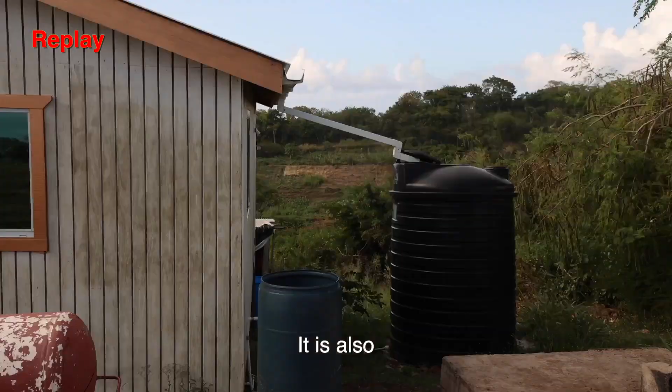For climate change, what is Grenada going to experience? It's going to experience water shortage, particularly after storms and hurricanes, when the water system breaks down and you will need water in between. Rainwater harvesting could help. So rainwater harvesting is not only about getting water for drinking or for use, it is also about minimizing flooding and flood control.

The presentation on rainwater harvesting is in two parts, and the second part is going to be done by Mr. Alan Gilbert again. In case you don't quite remember who he is, he's standing right next to me. He's the Senior Technical Advisor at GIS, and he is going to continue with the presentation. He's just keying things up. So again, pay attention and learn.

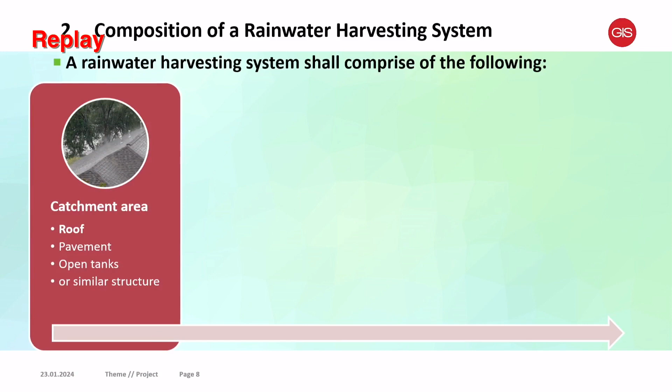There's a conveyance mechanism, which refers to what carries the water into the tank—guttering, gullies, and channel pipes—including a very important first flush system, also called a first flush diverter.

And then there is a storage tank or cistern, and we heard that the most common one is plastic. Concrete is the next in line, and there are also surface ponds and other similar structures.

And finally, there's the delivery or distribution system that speaks of the pumps that pump the water through the house, or pipes, taps, and hose.

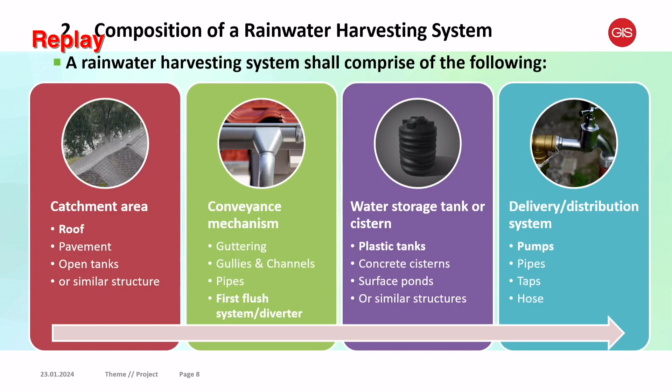And so now we get into more serious issues: design, planning, and approval requirements. And obviously, we have 2 persons from planning here, Ms. Janice Leslie and Mr. Houston Elcock, who is a technical officer in the Planning and Development Authority, so he's maybe able to answer questions relating to planning and design and approval later down. Okay, let's see if we can get through these.

Obviously, I'm trying to do some numbers here in second gear, and might pick it up a little bit. So under chapter 3, in the design, we have: all new buildings for domestic, commercial, industrial, or governmental use shall include in the design submission to the Physical Planning Authority an appropriately sized rainwater harvesting system in keeping with table 4.1, 4.2, 4.3, and 4.4, which you will see later on.

As I go, I just want to point out, if you have a point of clarity that you need, feel free to stick your hand up, and maybe the head table can help point that out so that I can give the clarity.

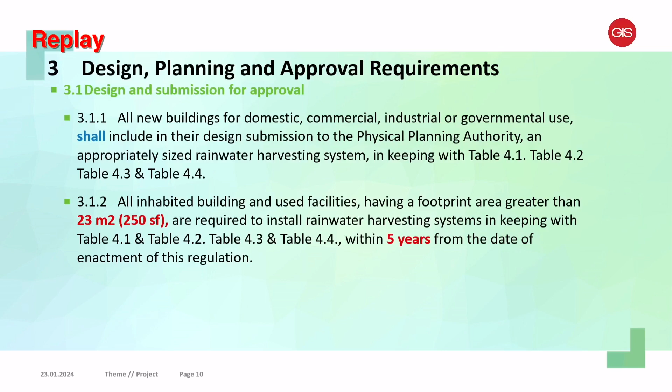We continue. In cases where a permanent structure must be constructed to facilitate the rainwater harvesting system, appropriate structural drawings shall be prepared and submitted by an architect, engineer, or draftsperson to the PDA for approval.

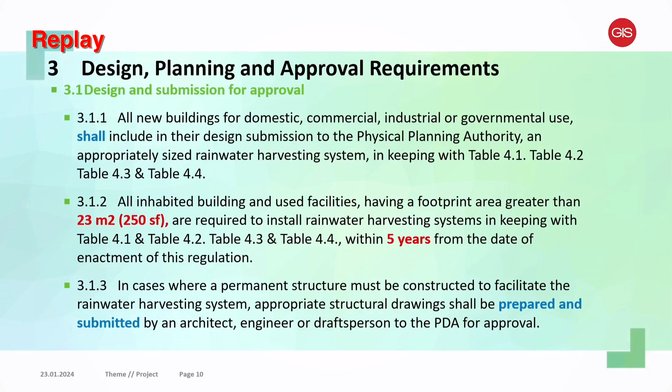In the event where a prevailing circumstance prevents a new or existing facility from having a rainwater harvesting system, a special request for exemption must be made in writing by the owner to the PDA, carefully describing the circumstances. The PDA will review the application for exemption and only approve the request in writing if it is satisfied that the request is reasonable. So I know everybody is interested to know what are these prevailing circumstances, and here they are.

One, little or no suitable space for installation of a rainwater harvesting system—that's going to be predominantly in the town areas. The installation of a rainwater harvesting system will pose a significant risk to the safety of individuals or nearby property, or in cases of extreme poverty of the inhabitants. And I move on.

Drawings submitted for approval pursuant to clauses 3.1.1, 3.1.2, and 3.1.3, the previous ones we just read, shall provide sufficient details for the construction and/or installation of the appropriate rainwater system, and should include all 4 components referred to in section 2.1.

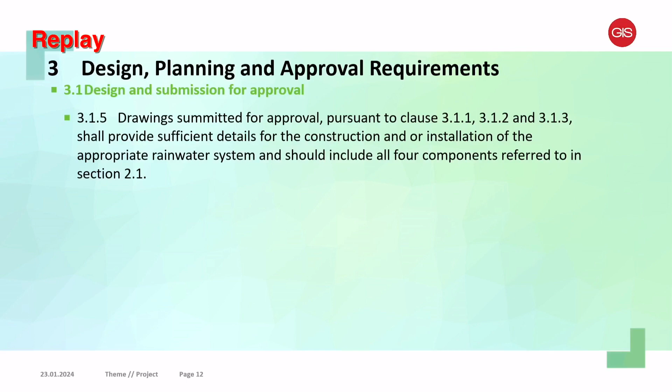Yeah, for clarity? Yeah. So back to the slide before. I think everybody can hear me, Mike. Okay, this slide? Yeah, the one about suitable space. So clarity or query? Okay, all right, fair enough.

So the question I have is on the suitable space, little or no suitable space for installation - who determines what little or suitable space is? For example, if I'm in town as you're suggesting, and there is space for a 100-gallon tank, but I want a 1,000-gallon tank which can't fit, would I be obligated to put a 100-gallon tank?

Okay, so very, very good question, but one meant for the next section. So I'll ask you to stick a pin on it, maybe note it, and have my colleagues also recording it so that we could come back to it, because we don't want to miss that question, okay? So I know if we start, because we've been there before.

All right, so I think I am here. Let me just make sure I'm not missing anything. So, drawing submitted, okay? Shall have sufficient details.

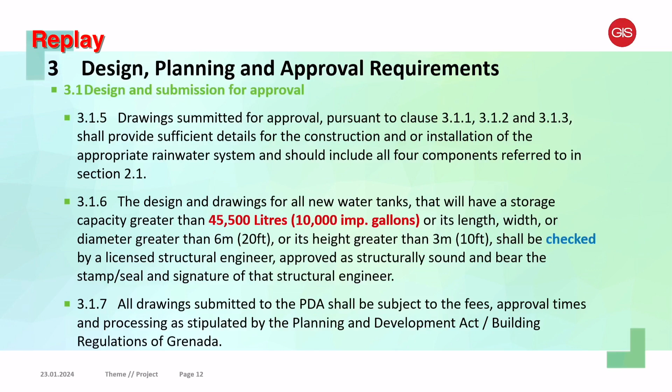3.1.7: All drawings submitted to the PDA shall be subject to the fees, approval times, and processing as stipulated by the Planning and Development Act or Building Regulations of Grenada. And there's a waiver - application fees will be waived for submissions whose building footprint area is less than 250 square feet and does not exceed 1 story high. Okay? I believe that's also clear.

All tanks or cisterns which shall have a storage capacity greater than 50,000 gallons shall be designed by a certified civil, structural, or water engineer, or a combination of the above.

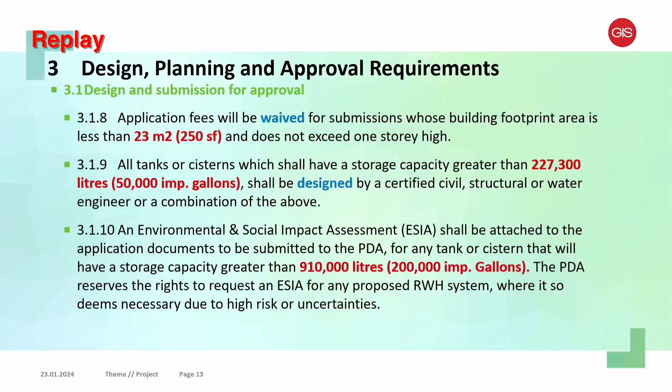Okay, moving right along. All right, so that's it for design and approval requirements. Now we go to storage capacity requirements, and we're looking at domestic storage.

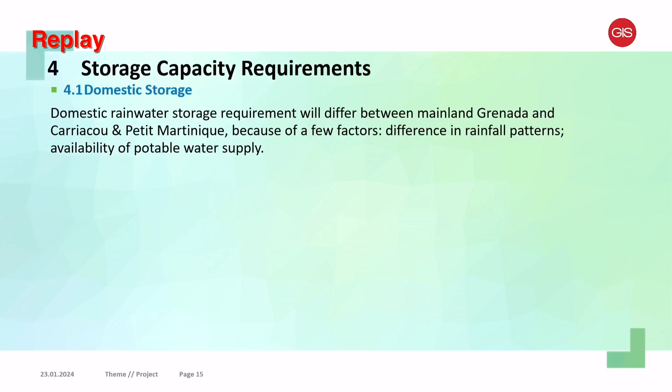4.1: domestic rainwater storage requirements will differ between mainland Grenada and Carriacou and Petit Martinique, because of a few factors - difference in rainfall patterns, availability of potable water supply. This is for clear reasons. We went to Carriacou with the same numbers as for Grenada, and the people who came out clearly indicated to us that the numbers were too small, so we increased these based on the consultation done at Carriacou.

So we'll see those later. But for Grenada, domestic rainwater storage is based on the footprint area of the building, with the minimum storage capacity shown in tables 4.1 and 4.2. For calculating average storage on mainland Grenada, a factor of 0.75 gallons per square foot can be applied. This is just a general rule of thumb for designers - they can use this to come up with the minimum.

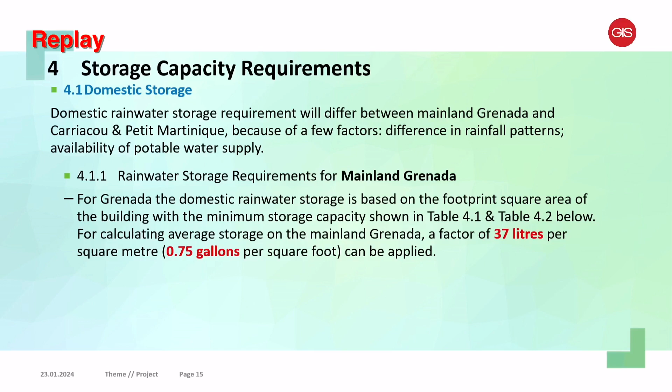So we have - it's reasonably visible - the minimum storage table before us. For a building that's less than 250 square feet, and we'll just deal with the imperial gallons - we have 3 units of measurement here: liters, imperial gallons, and US gallons - it's 200, they will be required to have 200 gallons. And so on and so forth.

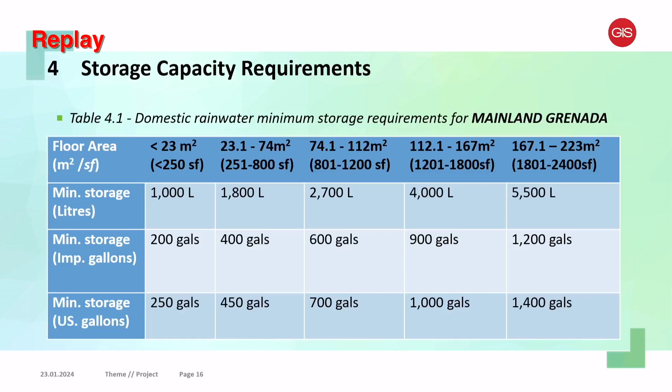So between 251 to 800 square feet, 400 gallons. 800 to 1,200 square feet, 600 gallons. From there up to 1,800 square feet, 900 gallons. And 1,801 to 2,400, 1,200 gallons. It goes on with a few more sizes, 2,100 up to 4,000 gallons. I'm sure you can see the numbers instead of me just repeating them. I'll leave a few seconds for you to look at it, and we'll proceed.

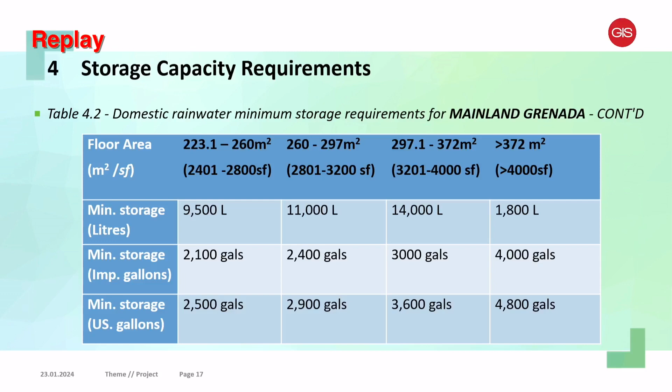All right, so for Carriacou, I just go to the bottom. Instead of 0.75 gallons, it's 5 gallons per square foot.

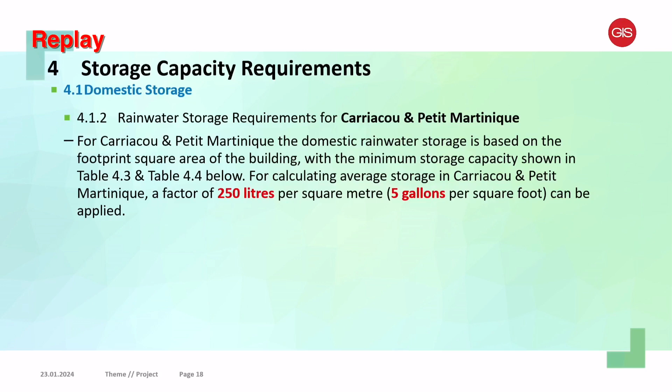Okay, and the tables are as follows. This is 4.3. So for the same 250 square foot house that was 200 gallons in Grenada, in Carriacou the requirement is 1,000 gallons. And goes all the way up to, for between 1801 to 24, it's 12,000 gallons.

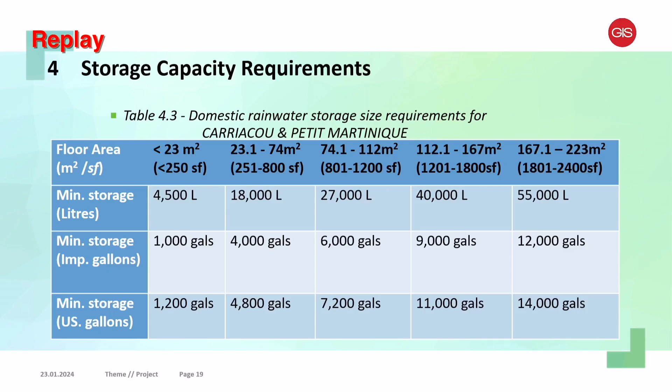And for greater than 4,000, 25,000 gallons. And we're told many houses already in Carriacou are much more than 25,000 gallon tanks. One person at the consultation had way more than 25,000 gallons already for his home.

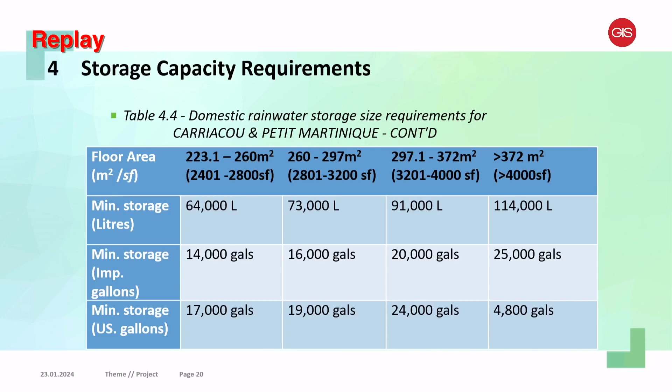All right, so under the ICI sector, there's a formula for coming up with the minimum storage. It's roof area, RA, times the storage factor, and the storage factor we'll find in some tables. So what—

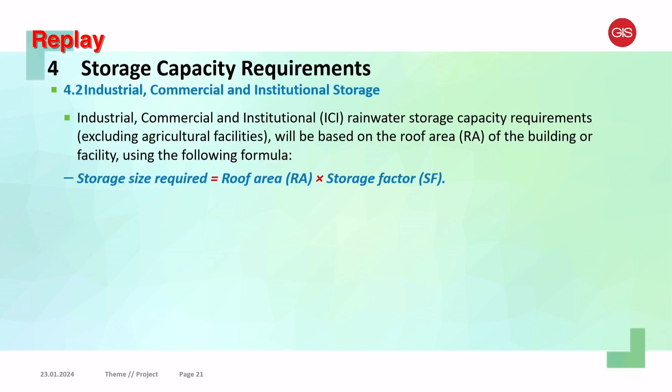I just jump in here to the formula for accommodation facilities, which is the number of rooms. So sigma there for the engineers is sum of all the rooms. You add up all the rooms times the storage factor, which again we'll see in the tables.

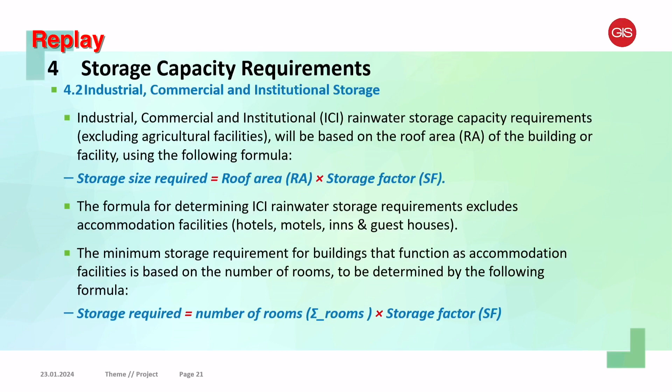Okay, so this—and I hope you can see, because a lot of numbers there—let's just take one or two examples.

Commercial, medium, and large. If your building—this is the criteria—if your building is greater than 1,000 square feet but less than 5,000, and or 10, but not greater than 50 users per day, then you will multiply 2 gallons per square foot to the square footage of the building. So if you have a 2,000 square foot building, you will multiply by 2.

And your minimum will be 4,000 gallons, but then there is a minimum, which is 2,000. So for any commercial entity that is between 1,000 to 5,000 square feet, they cannot have less than 2,000 gallons, and so on and so forth. Okay? Is that clear? Is that understandable?

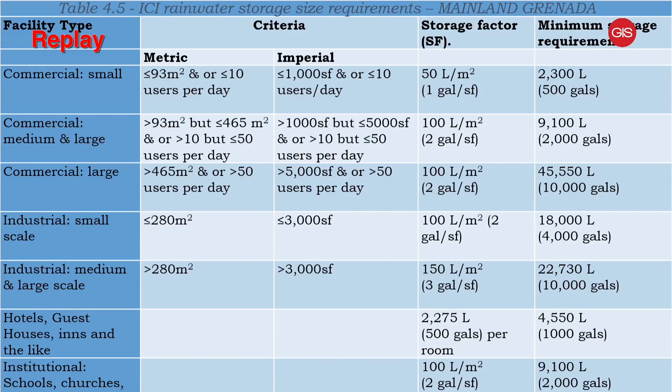Okay, very well. So moving right along. And this one is similar for Carriacou. I'll take the same one, medium to large. It will be, instead of 2 gallons per square foot, 5 gallons per square foot times 2, that will be 10,000 gallons, and 10,000 is the minimum for Carriacou. That's for this category. And obviously we have for large industrial at two scales.

Then we have hotels, guest houses, inns, and also institutional schools and churches. In Carriacou, they would require 6 gallons per square foot. Okay?

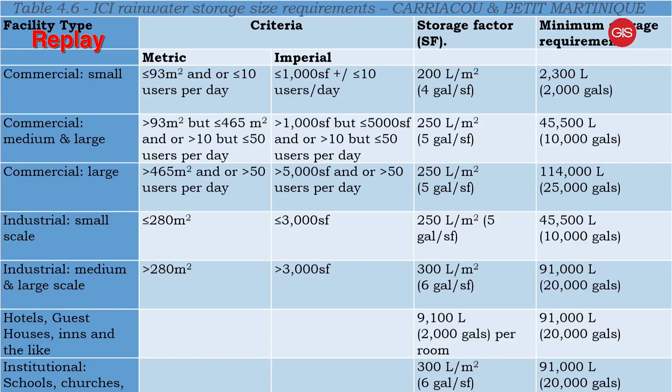Also for agricultural facilities that have buildings, roofs, or catchment-like surfaces, they are encouraged to install a rainwater system with a storage tank that can contain 250 liters per square meter of the roof space, or that's 5 gallons per square foot. Specially designed and maintained surfaces, ponds or dams, are also encouraged with the assistance of a design professional.

And this one, you notice the language is a little different, and you will see it says 'encouraged.' Obviously, a farmer wants to make sure his crops are fed with water. Him putting in a system will be beneficial to him. So if he doesn't, obviously he would lose his crops. So that's his incentive right there.

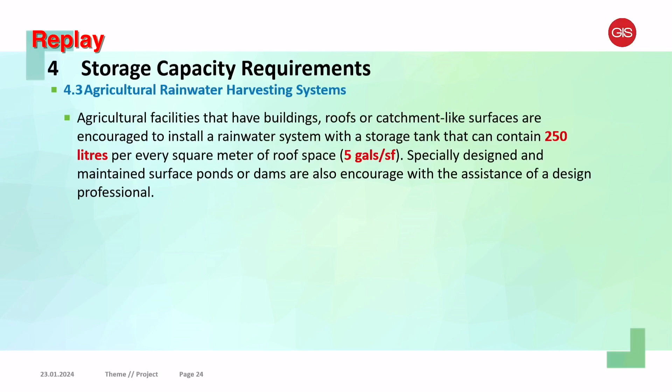Okay, and now we move to the final section, which is the rainwater quality guidelines and requirements. Again, a lot of this has been clipped out, but I gave the main points that I believe will affect you. So we're dealing with catchment, and let me just read this.

Rainwater may be used for drinking purposes—somebody had that question earlier. It may be used for drinking purposes if it is collected using regularly cleaned surfaces. Let me just pause here to indicate that in Carriacou, persons drink water straight from the roof into a tank, and well, they're surviving.

So it's doable. Now, I have rainwater systems at home. I don't drink from it, though. I wouldn't take the chance. But it's doable. And obviously, we learned that there are some traditional ways of treating it by using small fish. Anybody remember the name of the small fish? Millions—that's it. Millions. We were told that in Carriacou. They put these fish in it, and there are other means of purification that they use.

We heard that before they will set up a tank, they will wash it with sugar water.

I did promise to research the science behind that, but did not get the time to do so, so I need to put that on my agenda.

Yes, rainwater can be consumed. A good friend recently asked me about this - their partner puts a bucket outside, catching rain and drinking it like that, and asked if that is safe. I said it's absolutely safe to do, especially if it's in a clean vessel, a clean utensil.

However, this is the regulation now. Rainwater may be used for drinking purposes if it is collected using regularly cleaned surfaces which are not used for vehicular activity and which are not in close proximity - that's further than half a kilometer or a third of a mile - to industrial exhaust systems.

The catchment may be constructed from materials deemed safe for drinking water, such as Portland cement concrete, galvanized and galvalume with non-toxic baked or enamel finish, clay tiles, slate, non-treated timber, plastic, PVC, PE which is polyethylene, along with other non-toxic materials deemed safe by a trained professional in the related field. That is clear, right? Okay.

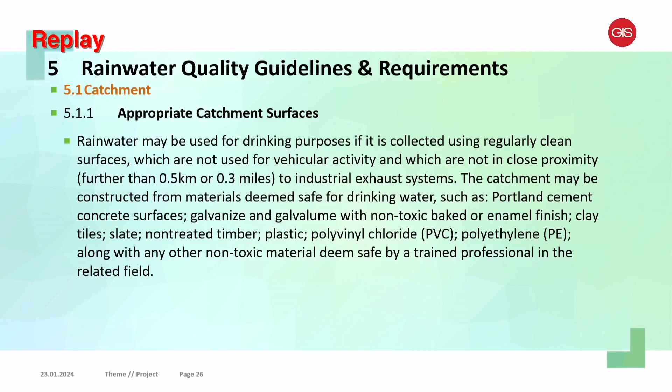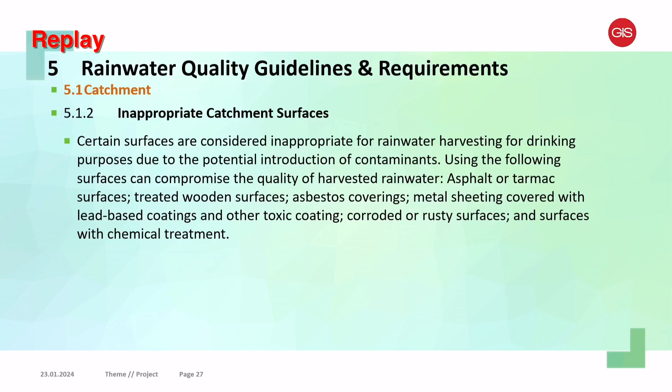So catchment shall be maintained in accordance with specifications provided in Table 5.2, and we are going to see Table 5.2 in a few slides.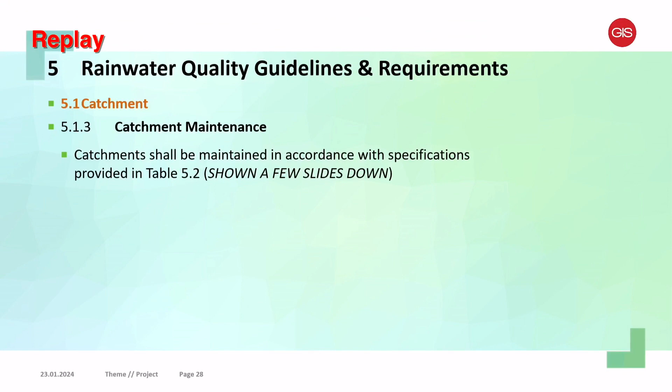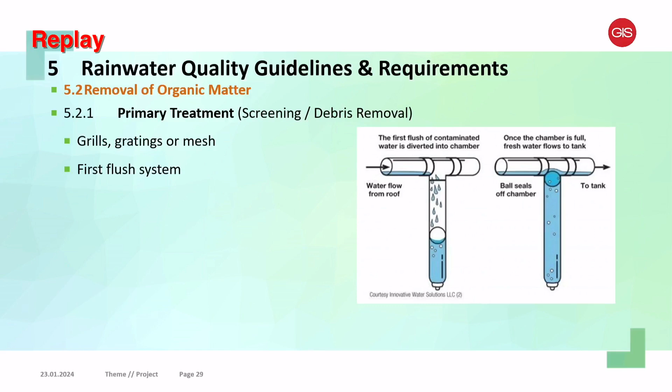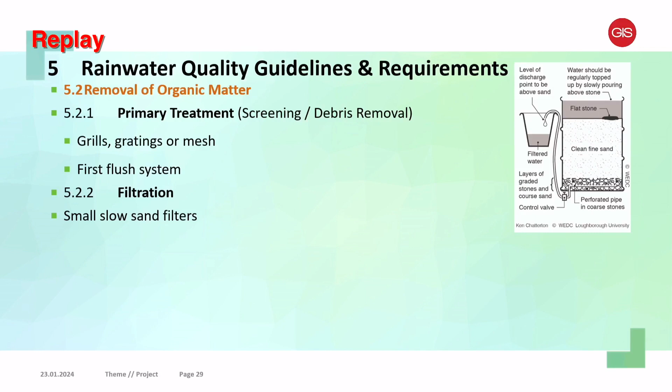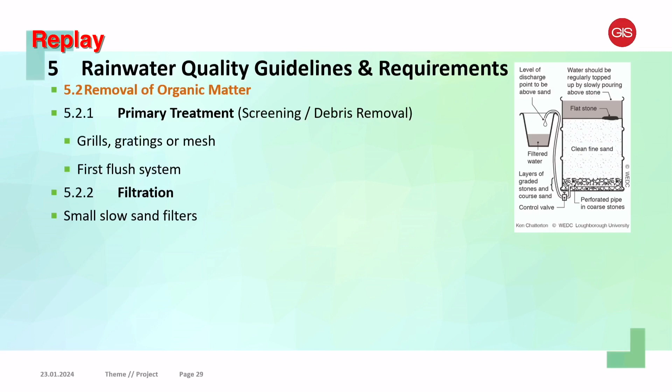And then there is filtration, using small slow sand filters that you can create yourself. We have these little diagrams, and obviously you can research those and find them online - DIY, do it yourself projects. This is very easy to do. Persons can do those, as well as there are much larger systems, medium to large slow sand biofilters, which are used by NAWASA, and happy to say this is a design I did for NAWASA years ago while I was there.

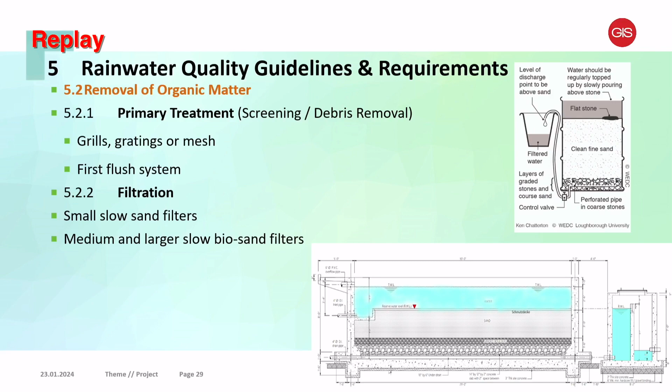Treatment against microbials and pathogens. There are many ways rainwater can be disinfected and or treated against harmful bacteria and pathogens, including boiling, distillation, iodization, and chlorination. The following subsections will highlight and recommend three key treatment methods, and those will be boiling, chlorination, and ultraviolet water treatment.

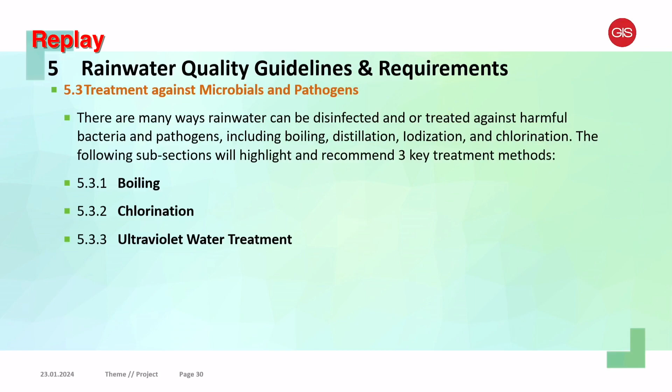We also considered prevention of chemical and toxic contamination from well-known sources, and then there's also a section on labeling. Labeling is important, as we spoke about the mixing of water, which is discouraged - so that speaks to that.

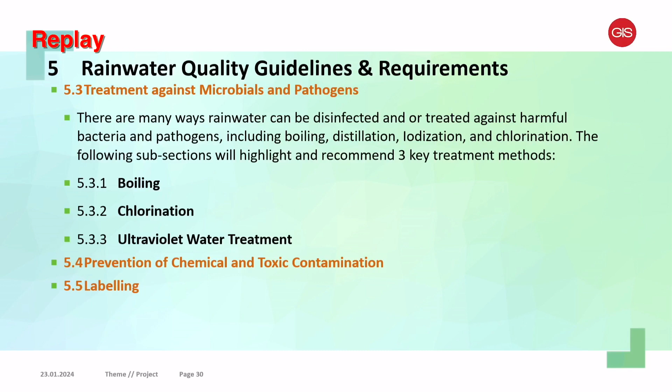Design requirements for treatment facilities or treatment systems. Any rainwater treatment system, supposed to be rainwater, to be used for drinking purposes, shall be designed by a certified civil, environmental, mechanical, or water engineer, or a combination of the above, or by any individual or group so trained and certified to design such systems. The design shall be presented to the PDA for approval along with the other components of the rainwater harvesting system. Is this clear? Mm-hmm.

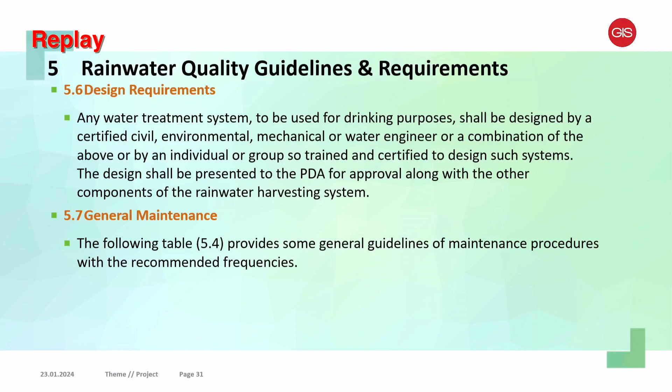Maintenance of the system. The following table, remember table 5.4, which we spoke about a few slides above, provides some general guidelines for maintenance procedures with the recommended frequency. I'll just show it - it's a bit small.

It speaks of what you do with your roofs, to wash them off with water and so on, and the frequency is monthly, especially after long periods of dry weather. And all of these again are from well-known sources, scientifically proven, tested and proven. Again, we wouldn't stay on this - if we have a question on it, we could come back directly to this. So remember, the table is table 5.4.

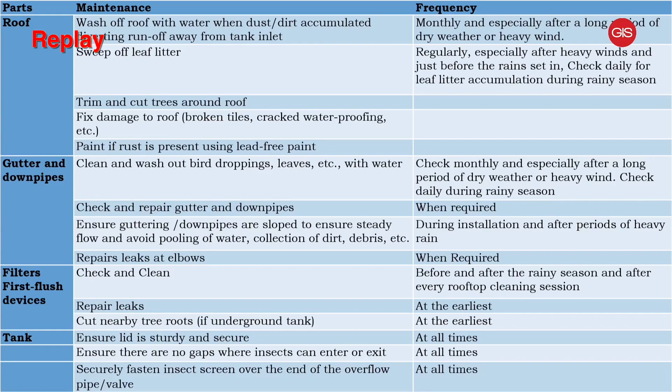So quality surveying, sampling. Under quality surveying, there's 2 subsections: sampling and testing. Testing is going to be more important for us, so I'm going to show some of the clauses on testing. It's required that all owners or managers of rainwater harvesting systems used for commercial purposes, especially those used for drinking water and or personal hygiene, carry out inspection of the rainwater system and testing of water quality every 6 months. The water quality shall include but not be limited to the parameters set out in table 5.3. Obviously they're not limited to those, and this may require revision to see if the parameters set out are sufficient, the ones that are absolutely necessary to review.

Okay, so testing and inspection, we're looking now at quality, checking for quality. Testing and inspection organizations - this is the heading there, because of some last minute editing to get the size larger, the heading came from another slide, so forgive that. This is supposed to be accredited agencies for testing, right? So testing and inspection organizations - oh, there it is below. We're still under rainwater quality surveying, but the heading is there in black.

Testing and inspection shall be carried out by organizations accredited to do so, like the Grenada Bureau of Standards, or any other body or organization so accredited by the PDA. So obviously the PDA has some responsibility here to approve these bodies. And there's a business opportunity here for persons to set up labs and get accredited by the PDA so you can do testing, because obviously the GDBS will be overwhelmed with the amount of testing they will need to do. So there are lots of business opportunities coming out of this - this is just one of them.

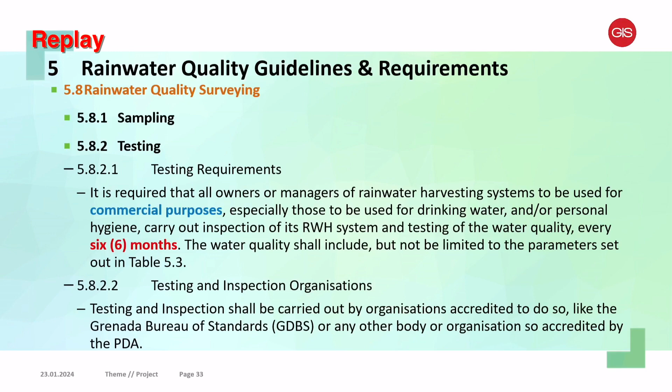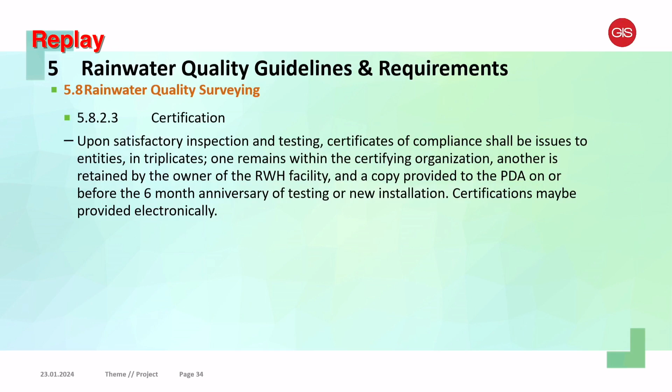Certification: upon satisfactory inspection and testing, certificates of compliance shall be issued to entities in triplicate. One remains with the certifying organization, another is retained by the owner of the rainwater harvesting facility, and a copy is provided to the PDA on or before the 6-month anniversary of testing or new installation. Certifications may be provided electronically. That's clear, right? Okay, silence is consent.

Failure to provide certification: if a commercial entity fails to provide the PDA with the necessary certification - let me take my time and read this - the PDA shall formally request the owner of the facility to provide the required certification within 2 weeks of the communication being made. Further failure to do so may result in the PDA filing an injunction to have the facility shut down until the issue is resolved and a certificate is provided. Bear in mind, this is for commercial entities who are going to be using the water for drinking purposes and or hygiene purposes. So is this clear?

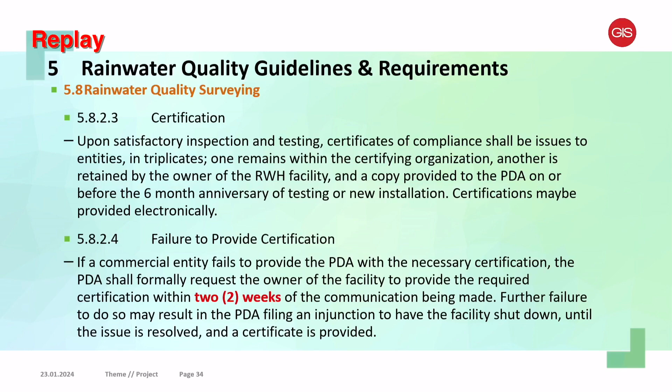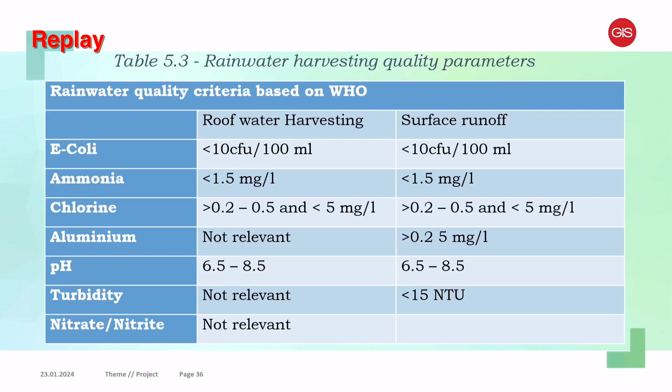All right, so that, I believe, brings us to the end of the important bits from the draft regulation. And I thank you for listening, and I know you have some questions. So I'll invite Ms. Leslie to come again and moderate the session, and I will join the team, and we will take answers. Some questions, obviously, will go to NAWASA, some to PDA, some to GDB, and we are here representing G-CREWS.

Just to remind you, on the panel from my far right, that is Mr. Houston Elcock, and he is with the Planning and Development Authority. He's a senior development control officer, and he's going to be fielding most of the technical questions from you regarding the PDA. We also have Mr. Terrence Smith - I know I skipped Ms. Joseph, but we have Mr. Terrence Smith. Not only is he a very, very senior and experienced engineer, but he's also the acting manager at NAWASA.